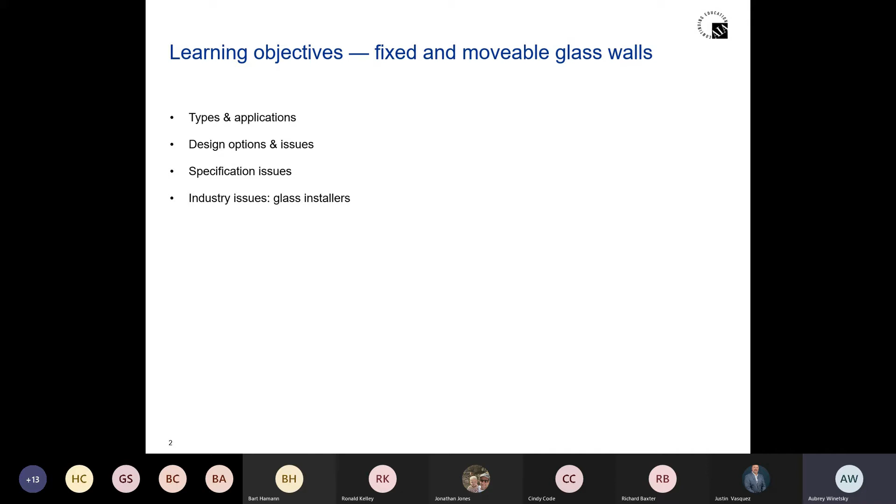There are different types of glass wall systems, and we'll go through the two types here, taking a break after each section for questions. We're going to talk about fixed glass wall systems, which include patch fittings, rails, and single point or spider fittings. Then we'll move into movable glass wall systems, where we get into stacking, bifolding, biparting, and bottom rolling.

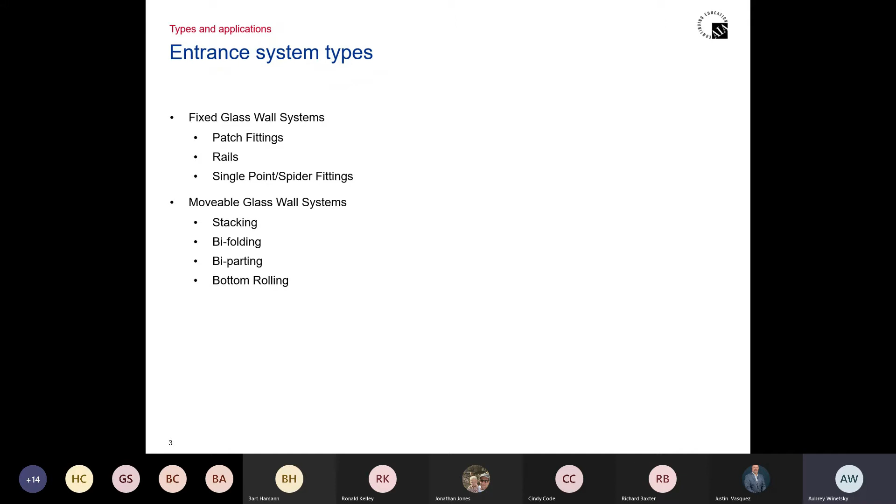There is a group called GANA, G-A-N-A, which stands for the Glass Association of North America. GANA is a group of industry leaders that put together some general rules we should all follow. If you came to me and said, 'I want to make this glass door 13 feet tall and only use half-inch glass,' I'm going to defer back to GANA and tell you we probably shouldn't do that. GANA recommends that we stay within certain heights. GANA is not a code, not a law, not anything we have to follow to a T. However, they are recommendations, and many glass fabricators will not fabricate glass pieces outside of GANA recommendations.

These are the four glass door types that GANA has given names to: type P, BP, A, and F. We'll go through these a bit more and the pros and cons of each style.

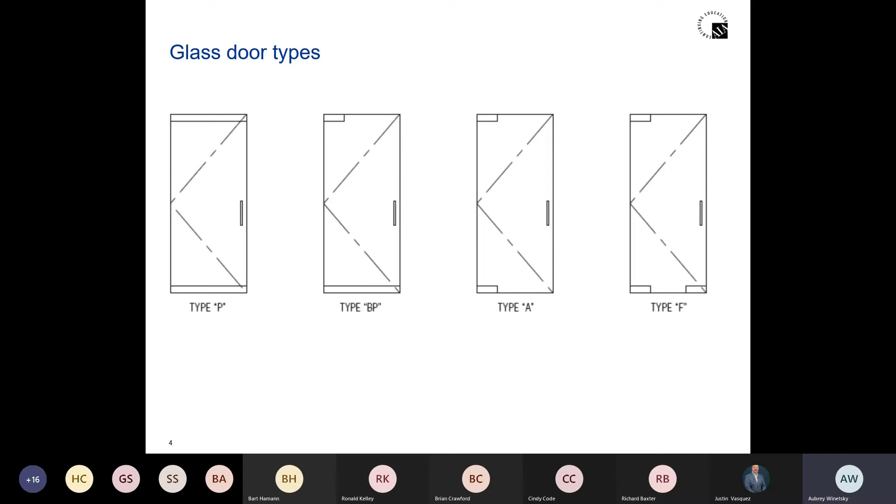So here we have the P style door, and I would say you're probably going to see these, if I had to take a guess, probably 80% of the time. A P style door means that you've got a rail on the top and a rail on the bottom.

With this door, GANA will allow you to go to about 108 inches, and I know we see doors much taller all the time, and you can push those limits a little bit. We'll talk about that more throughout the presentation. But with these doors, this gives you the most adjustability. You can go from left to right, in and out, top and bottom. You have a lot of adjustability on how that glass sets in these rails.

With top and bottom rails, you are staying within ADA compliance, and you do have space to mount hardware. So if you needed to use a Maglock, you've now got that top rail that you can mount to. A lot of good reasons why these are probably used most often.

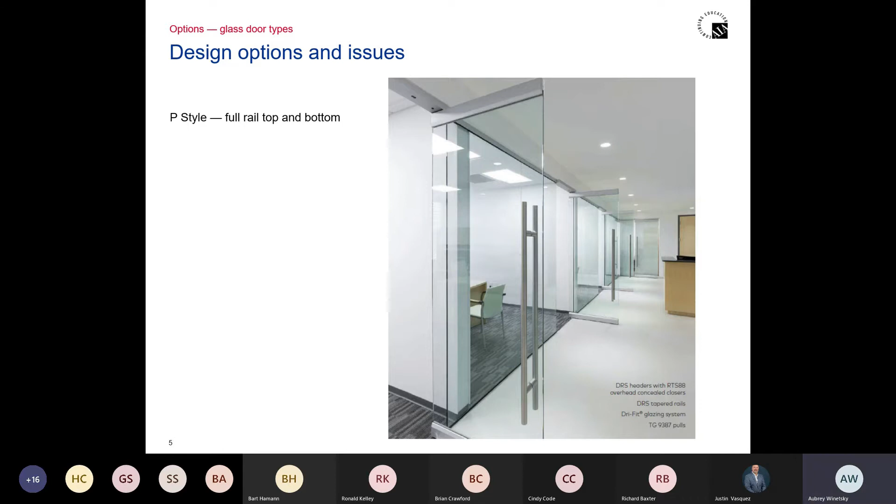A BP style door, as a matter of fact, I just specified one of these yesterday. The architect I was speaking to was concerned. I'm in California, so a lot of the projects I work on are in California, and California, as some of you may know, we're very strict about ADA, and it even boils down to having our own codes as it pertains to ADA in a lot of ways.

This particular client was concerned about having a patch fitting on the bottom and that not technically meeting ADA, as far as that 10-inch bottom clear smooth requirement goes. So we chose to use a bottom rail on this door and then to use a patch fitting at the top, still staying very much within code, but also allowing for that really unobstructed view of the glass.

With this type of door, you're only going to be able to use a floor closer, unless in this situation we were to use something like a floating header. But these are most often used with floor closers. This is going to have a little bit less adjustability when it comes to setting the glass. You're really only going to have a little bit of adjustability up and down.

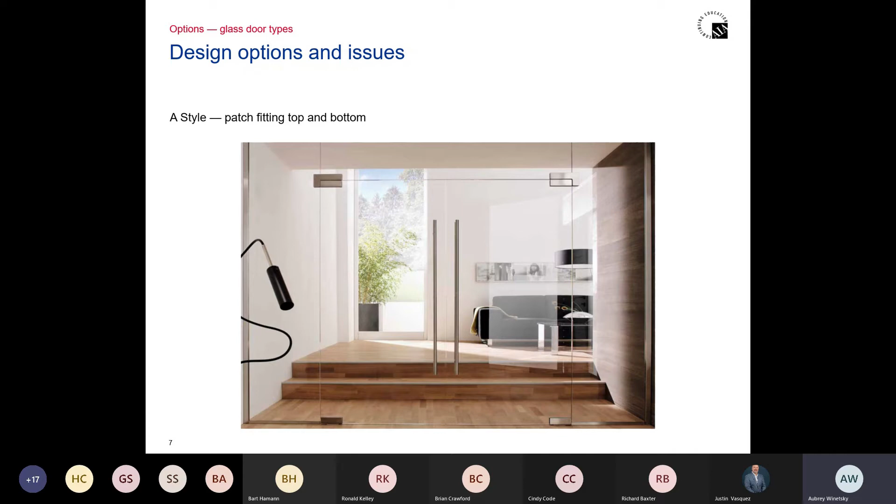With this type of door, you're going to be limited on the size. GANA recommendations, the maximum height for this type of door is about 102 inches. And the adjustability is going to be very, very little, really only a little bit of up and down with the glass.

This, I would say I've probably only specified this a few times, only because my first concern would be ADA, having to have someone get down to the bottom of that door to kneel down and to lock it. So it's not used very often.

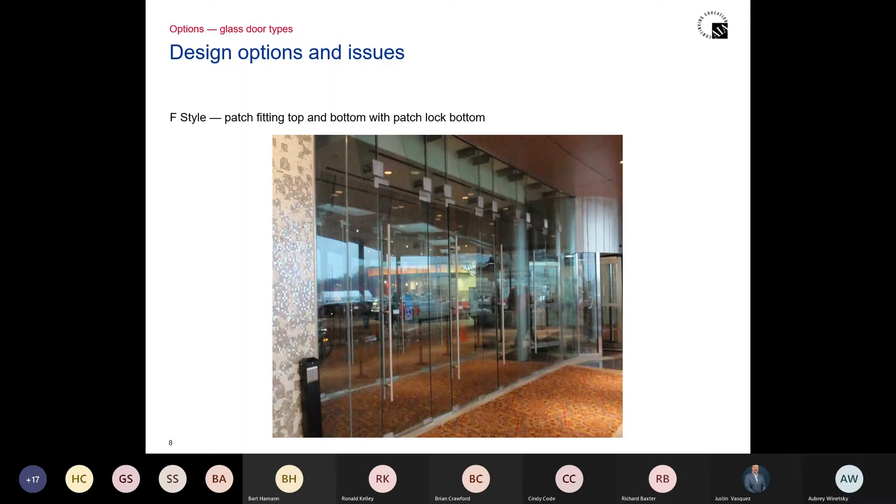This is kind of what a patch fitting looks like. Generally, depending on who the manufacturer is, they're going to be about 2 by 6. You actually prep the glass for the patch fitting to lock or to be mounted through to give you a secure hold of the glass. So this is kind of a cut of what that looks like.

Some of these patch fittings come, as we can see here on the left, we've got 3 of these covers, and some of them come as a stainless steel fitting, but they come with a plate that can be mounted, and that plate can cover, you can pick different finishes.

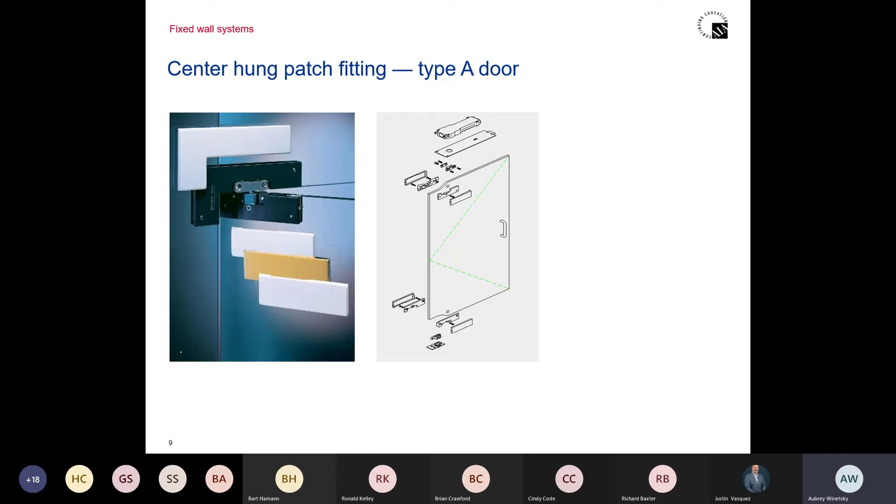You can leave that cover off during construction, so if you're afraid that something's going to be damaged, you leave the cover off, the door can be fully functional. Then at the point that the job gets turned over, you add the cover back on, and you avoided it getting damaged. The covers snap on and snap off. If you wanted to change the finish, you could do that, or if they got graffitied or damaged in any way, you could easily swap that out. So that's kind of a nice feature on those.

Now we get into rails, shapes, and sizes. I always say with this photo, I don't know if this is a good representation or a bad representation. I'll let you guys be the judge of that. But when I look at this picture, the first thing that jumps out at me personally is I see that we've got probably a 4-inch top rail there and a 4-inch rail on the bottom.

And then you've got just a U-channel on the fixed lights. Now, it looks nice on the fixed lights, I'll give them that, because you don't have a lot of bulky hardware, but you've definitely got this difference in sight lines. So you've got this rail here and then it doesn't really match up here. So that's the first thing I notice.

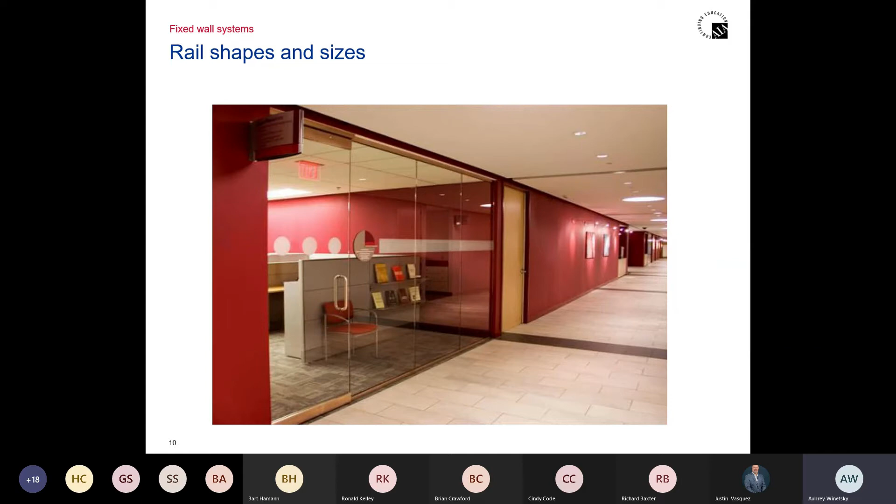So rails, you can get side light rails that basically hold the fixed lights of glass. You can get those to match the same rails that you're using on the door. But they come in a variety of different sizes and a couple different shapes.

So as we move into looking at these rails, the different sizes and shapes, you'll find rails anywhere from 2.5, 3 5/8, 4 inches. I've seen 4.5, 6, 10, and I've even seen 12-inch rails before. The general rule of thumb is if you're using a 10-inch rail, it should be square. And for ADA purposes, if you're using anything less than 10 inches, that rail needs to be tapered at a 60-degree angle.

So as you can see, you can use something like the 2.5 and keep that really small profile height on the rail, but it has a taper, so you're staying within ADA. I often get from architects this idea that you have to use a 10-inch bottom rail, but you don't. You can go smaller, it just has to be tapered.

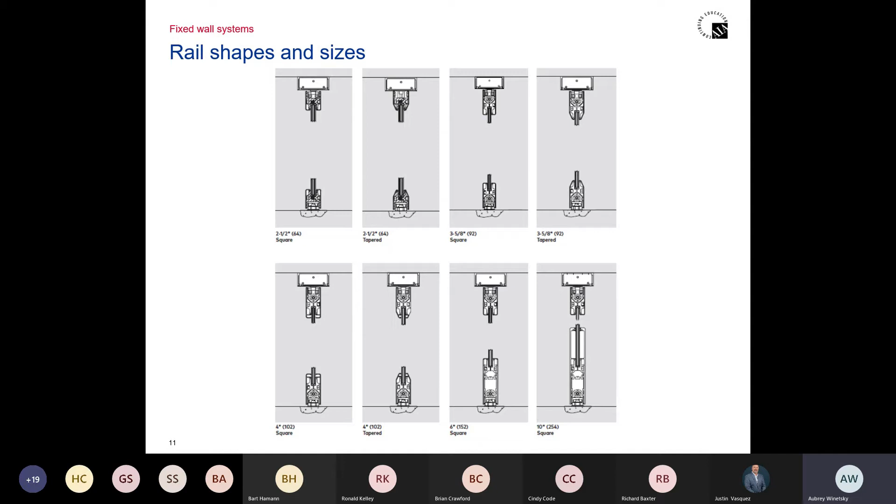When I was back in the automatic door world, we used this type of rail to mount glass for our automatic all glass doors. And it was a real pain because we'd have to order the glass and order the rails, and then we'd have guys come in and spend generally a whole day setting the glass into the rails. They'd take the bottom portion of the glass and sand it just to give it enough grit so the cement would hold on to it.

We'd set the glass into that rail and let it sit overnight. Then they'd come back the next day, flip the door over, and do the same process on the other side. So it was a very, very labor intensive process. And with an automatic door, we're looking at 4 panels just to make up one door. They'd spend the whole day, come back the next day, spend the whole day. Then the door was finally ready to be installed.

And heaven forbid that piece of glass break at some point. Or, since I'm in California, some of these doors were exposed to different weather conditions, heat. Eventually, sometimes this cement would erode and the glass would slip out of the rail. And in that case, the building is left really without security. You'd have to board everything up, bring the rails back in, and start all over with a new piece of glass.

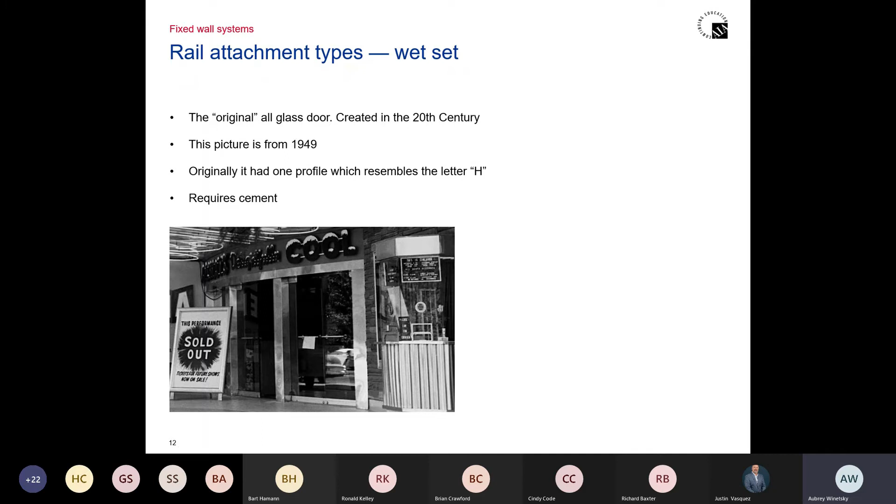And the problem is, I don't know about you guys, but in my career, I've yet to see a perfect opening. So you'd get these rails out to the job site, and unfortunately, the flooring was off, or the opening wasn't plumb and square, and there's no adjustability. Once these things are cemented in, they're done.

So that took us to the second generation of rails. This was a little bit better in a lot of ways, but there were still some problems. The second generation required a hydraulic press, and these were press-on type rails. You'd set the glass in, use this hydraulic press to press the rail onto the glass, and go from there. So much quicker. It didn't take all day.

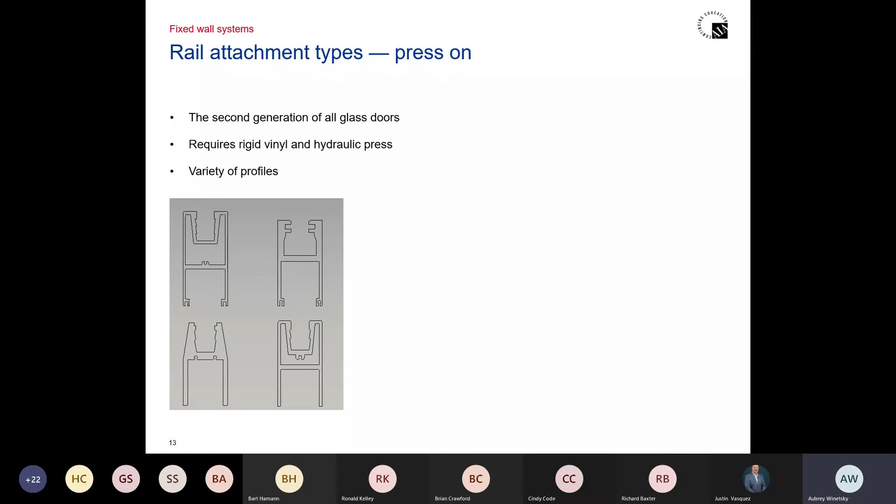It didn't take 2 days. But again, you're kind of faced with the fact that if the glass isn't just right, you have no adjustability. So once you take that out to the job site, if it isn't just perfect, you're not in good shape. And you had the price of buying the hydraulic press.

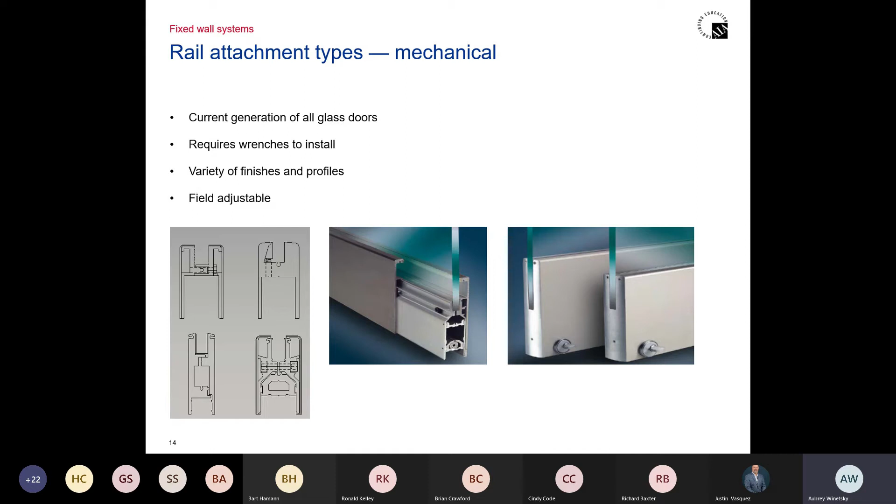So that brings us to the third generation, which is what most manufacturers are using now. The current generation is a mechanical channel that basically just requires an Allen wrench. You set the glass in, you tighten the Allen wrench, it clamps onto the glass, and you can do this in the field. You can do this in under an hour. You can adjust the glass. This is really the best solution we've found yet. So these rails work very, very well, much better than the hydraulic and the cement types of applications.

Now moving into headers. Every door is going to need a closer somewhere, and one of the areas where we can house a closer is overhead in the header. Headers come in a few different sizes. You can get 4 1/8, 4 1/2, or 6 inches, depending on what kind of framing you're trying to match up to or what you've got going on inside of the header. Inside that header, we can put the overhead closer. We can put shear locks or electric strikes. All of those items can be housed inside this header.

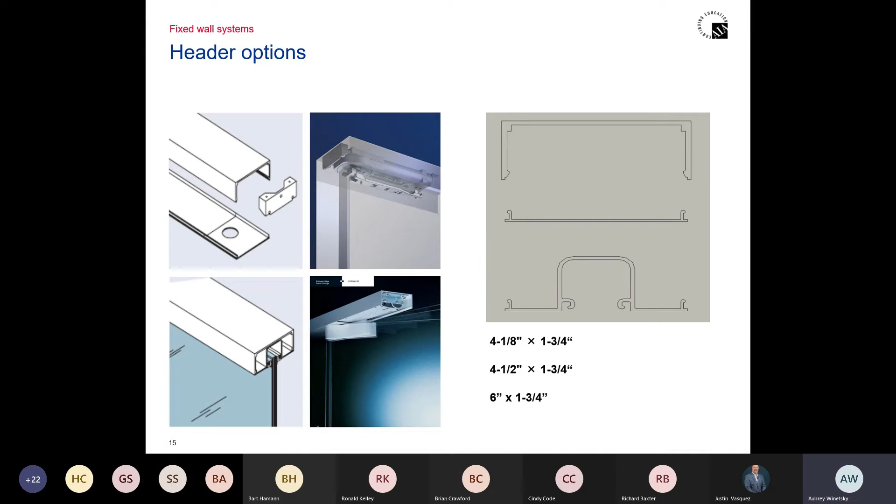So you've got the portion that goes over the door, which is what we're looking at right here. And then if you had the door and some fixed lights, like what we looked at a few slides back, you've got that header, and then the snap-on cover for the closer. And then you can have the glazing channel that will run along the fixed lights and hold the light of glass that you have there. So it's kind of neat that you can keep that same profile, run it the whole width of the door and the fixed sidelights, and keep everything looking very universal.

I often run into situations where, going back to that 13-foot door, I get asked for really, really tall doors that exceed GANA guidelines, or doors that could probably be made very tall, but then they're so heavy that people can't open them. So when we run into those situations, a floating header is a really good solution. If you want the look of a very tall door, or you have a transom above a door, but you can't use a floor closer, because for whatever reason you can't recess into the floor, or the door has a maglock on it, we have a floating header.

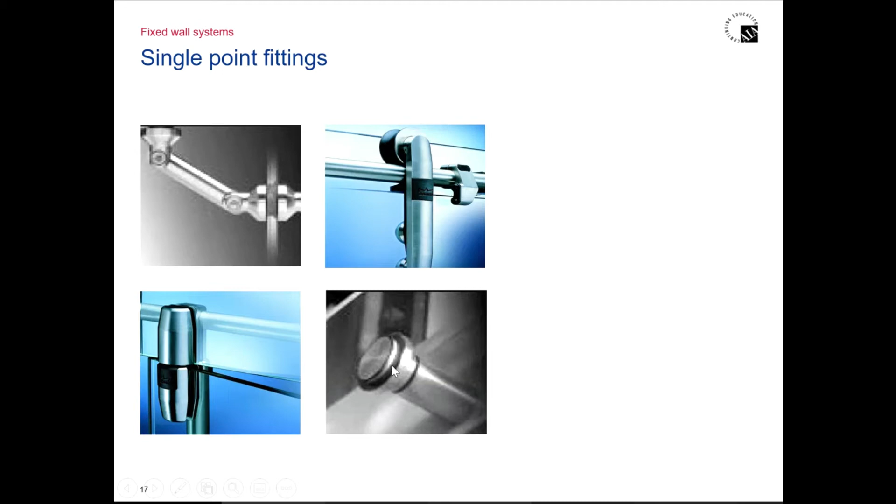Single point fittings. This still falls under the fixed wall systems category, and single point fittings are just another way that you can mount glass. We see it a lot in structural glass. These are just some examples. They're really hard to see. I feel like these pictures don't really do these products justice, so I'm going to go to the next slide, which I think is a little bit better.

Oops, I'm sorry, I thought there was another slide there. We see these a lot on stairwells. I personally have not specified any of these, but I do know that you see them a lot in stairwells where they're using that glass rail look. In offices, I've seen them interior and exterior, a lot in structural glass.

When we're specifying something like this, when we're looking at using one of these products, one of my first questions would be, do we have to achieve an STC rating? So do we have to worry about sound transmission? And depending on what that answer is, that moves us in the right direction as to which product

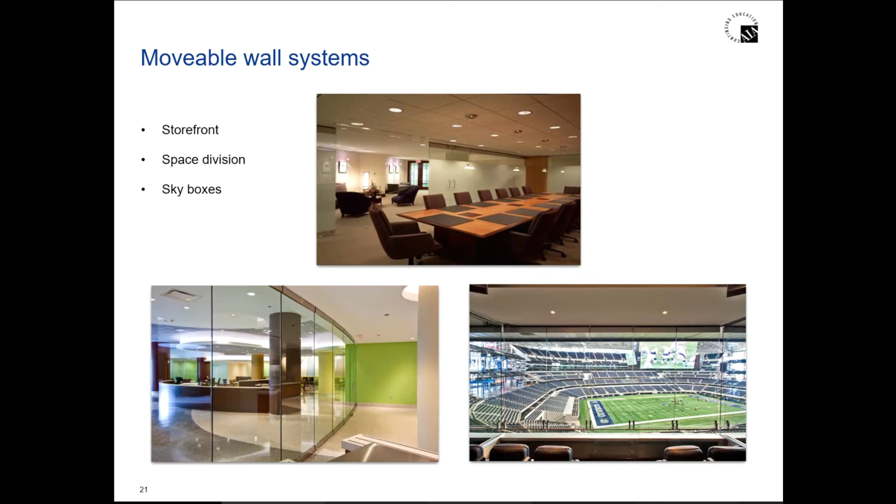When it comes to skyboxes, we're seeing these everywhere in suites, all over different stadiums where they want to have these particular skyboxes or suites. They want to keep that indoor-outdoor feel, so they can leave them open or leave them closed, just depending on weather.

And the stacking location can be anywhere. So if you wanted it to be right near that room, you can split it in half and have half the panels on one side and half on the other, or move them all to one side. If you want to have those panels stack away and store on the other side of the building, that's a possibility. The possibilities are kind of endless. It all just depends on how much room and space you have to run that top track.

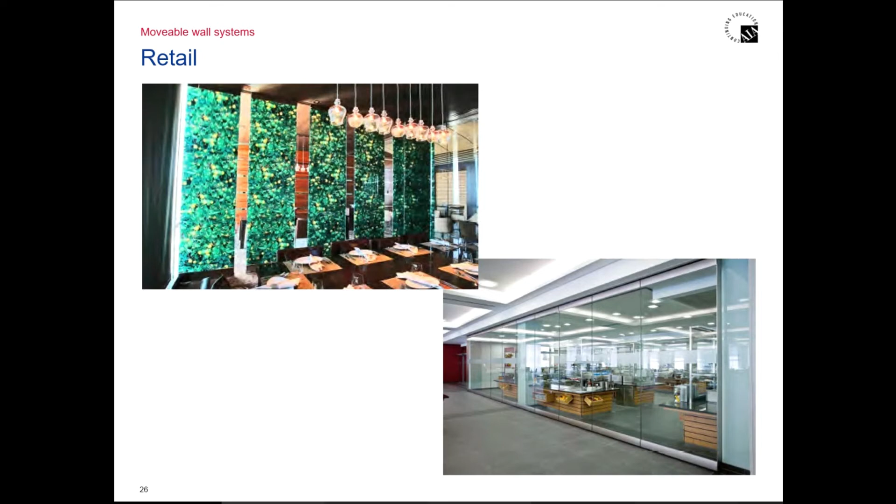Just some more examples in retail. Again, this is kind of like what I've seen in airport type situations where you want a big area for people to walk in and out of throughout the day when the retail store is open, but at night you want to secure everything and close everything up.

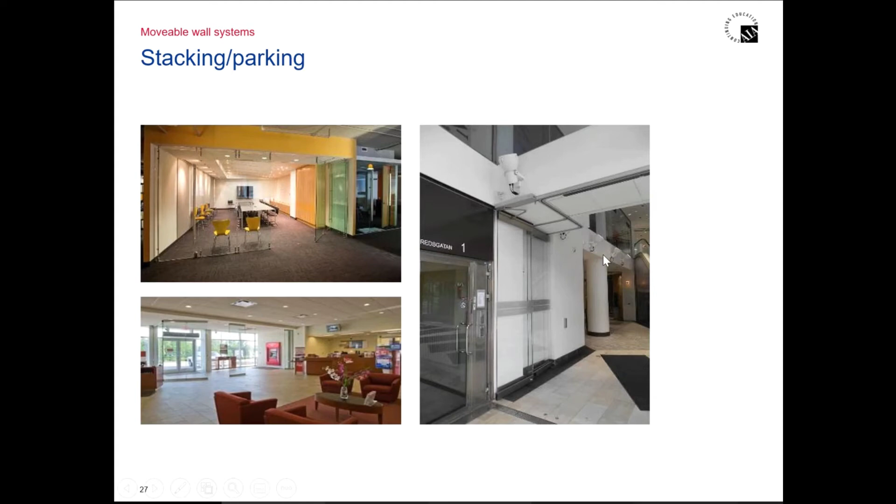These also come in a folding system. The folding systems are kind of nice because I just mentioned that stacking area where it turns into a lowercase h, where it turns into the 2 tracks. With the bifolding system, everything stays on a single track. So if you don't have the space to run that double stacking track up on top, a folding system might be a better option.

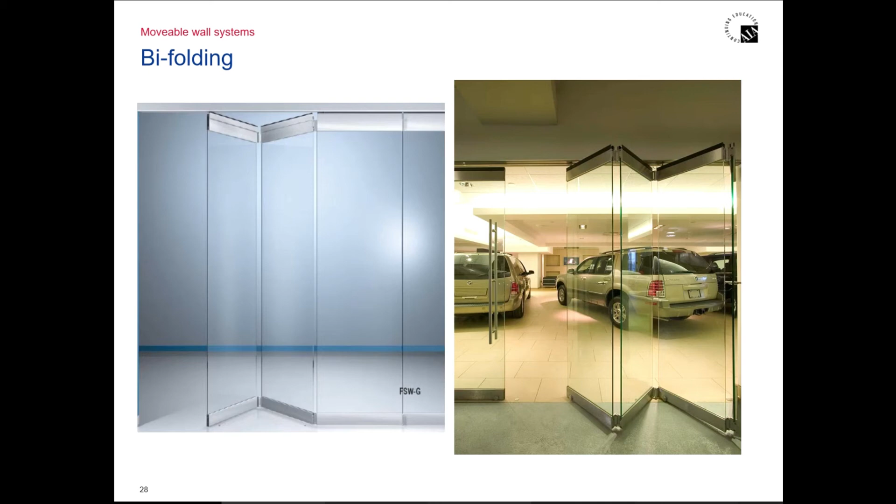I'll go ahead and get into, we're still within the movable wall systems, but now we're getting into more sliding systems. So going back to the first generation of sliding glass doors, they were all based on a bottom rolling or a bottom track system. A lot of people have gotten away from that bottom track, because you are required to have this bottom track in the floor. Most people like to have something trackless.

You get a lot of dirt and debris, which will eat away at the rollers if you're using a bottom rolling system. So just not the best system out there for that.

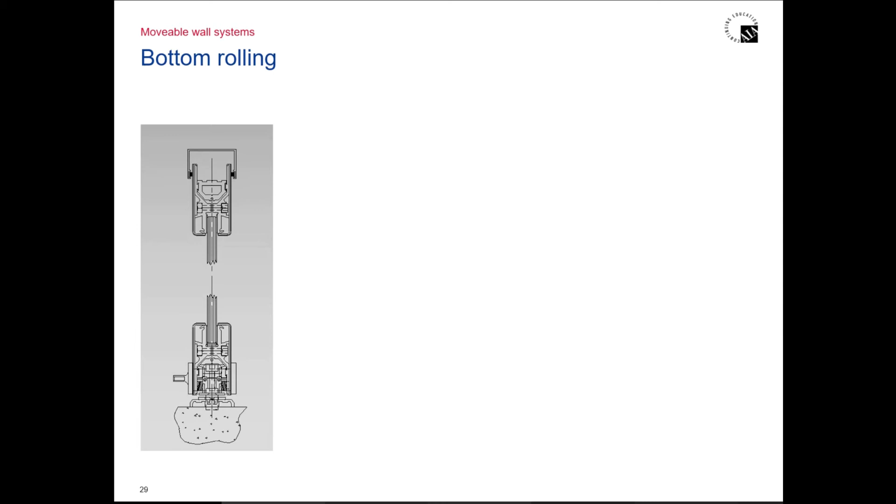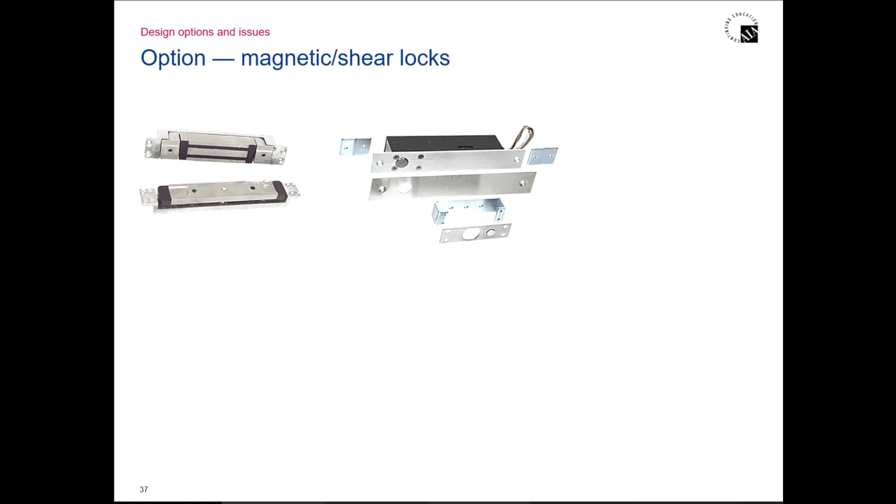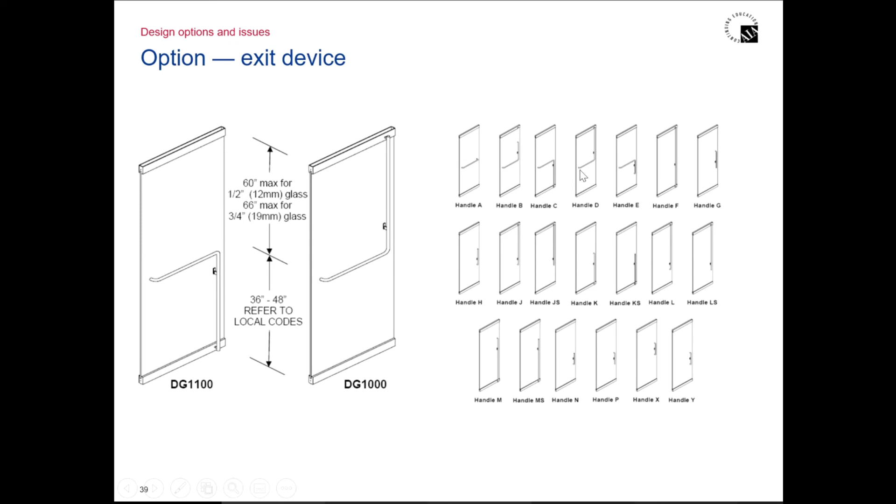There are exit devices available. I think we're all pretty familiar with this kind of tubular exit device. There are options to lock into the floor or into the head. Again, I never recommend they lock into the floor—I only specify locking into the head. These are some examples; this is the one that locks into the floor, which I'd never recommend. On the opposite side of the door, you have options for different types of pulls, so if you wanted a mirror finish for what you have, you can use this handle here, among a bunch of different types of pulls.

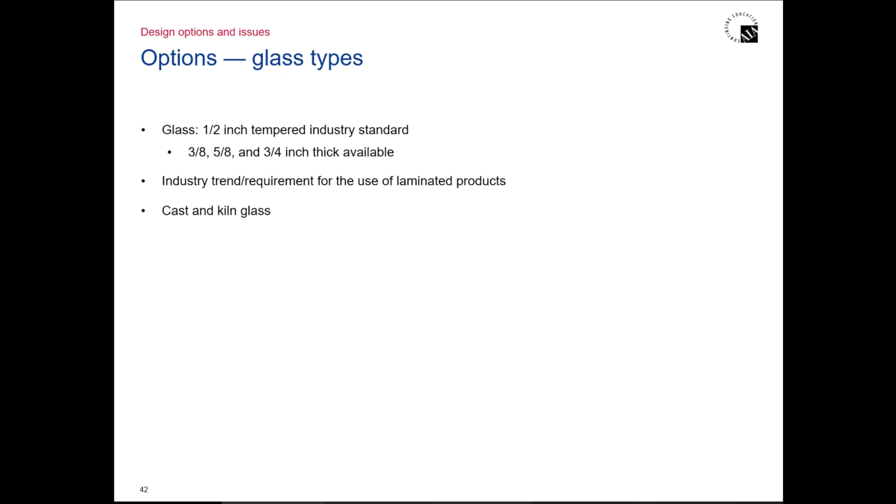That would be GANA's recommendation because it would help with deflection. You can use laminated products. We're seeing a lot of requests for laminated. And then cast and kilned, or textured glass, can be used with these products as well.

Some of the design options and issues with glass. We talked about this earlier in the presentation. It's glass, and glass can break, unfortunately. So it's probably not the most secure of items that you can put in a building, because you are always exposed to that potential of the glass being broken.

There is minimal noise abatement. We talked about that too, unless you're looking for something that's got a lot of framing around it. You are going to have sound transfer.

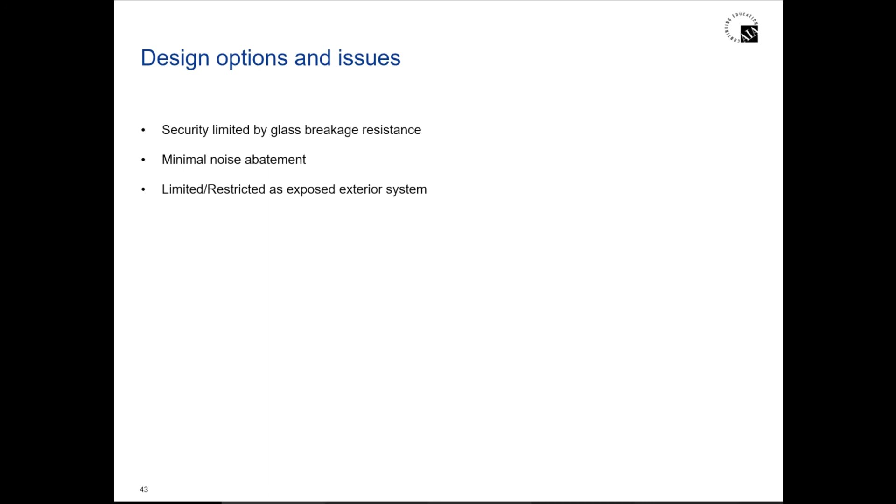And the question we talked about a little bit earlier, you are limited and restricted because these systems on the exterior of a building will have gaps. These systems inherently have small gaps, and we can do things to mitigate that. We can put seals in between, you can put brush and felt and everything else. But again, if you're going for this all glass look, and then you add all of these additional items, is that really what you're trying to do? Because it does kind of take away from that all glass look.

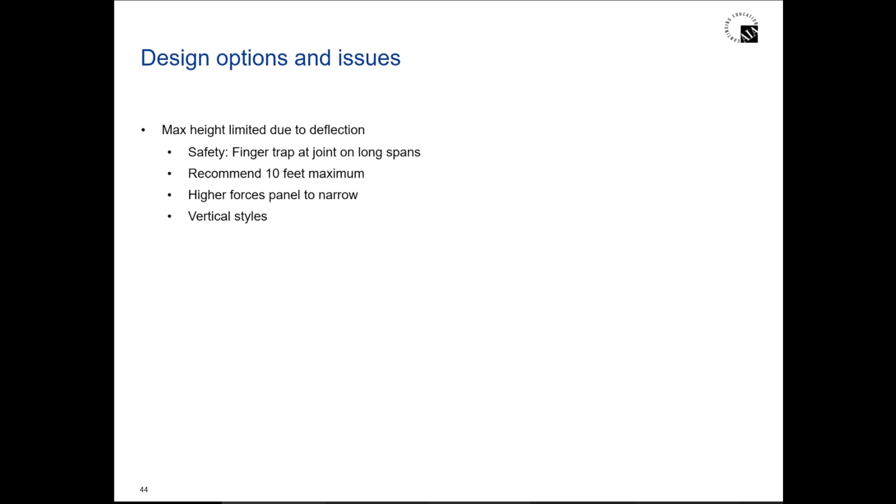We are limited to height. I mentioned that before, because of deflection. When the glass bows, if you have 2 pieces of glass on a fixed section, you can push that glass and actually pinch fingers in there. So it can be a little bit dangerous. So really most of these systems, you're going to have a 10-foot max. You have to add vertical stiles and things to help with the stability of that glass so that it just doesn't bow.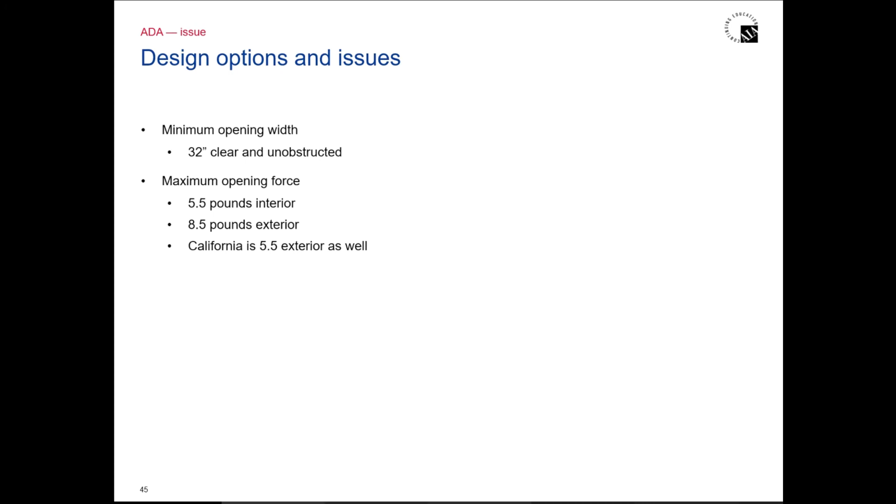ADA, we've talked about that throughout this presentation, so I won't go on too much on this slide. I would just say check with whatever opening forces are required, because again, these doors can get very heavy. Certain closers can only go to certain weights and won't allow for that 5.5 pounds or 8.5 pounds, depending on where you're at. Again, even with glass doors, we still need to keep in mind that we need to keep that 32-inch clear door opening.

And now as we get to the end of the presentation, and since we've got just a few minutes left, I'll save all the questions until the end. But when it comes to specification issues, these are the things that I will try and help you with if we were working together.

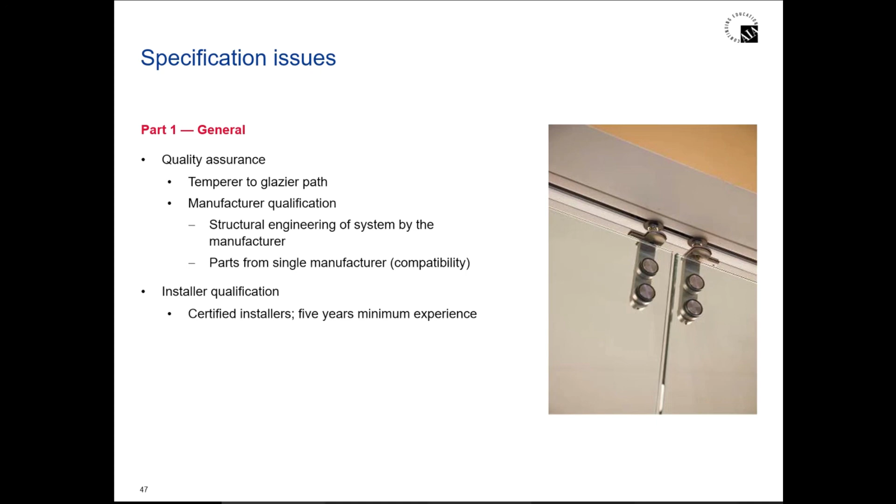We want to make sure, because these systems are made out of glass, they're heavy, they do require some structural support, that you're using high quality items and that you're going through the right people. You want to make sure that the installers have 5 years experience at a minimum, and that you're using a reputable glazier and manufacturer. You want to get all the parts from one single manufacturer.

With the glass wall systems, the movable systems, we like to recommend an hour of training for the owner. So whoever's using these systems, we want them to know how do they lock, how do they move, and how do you get them into those parking spaces. It's a good idea to look at doing a maintenance contract.

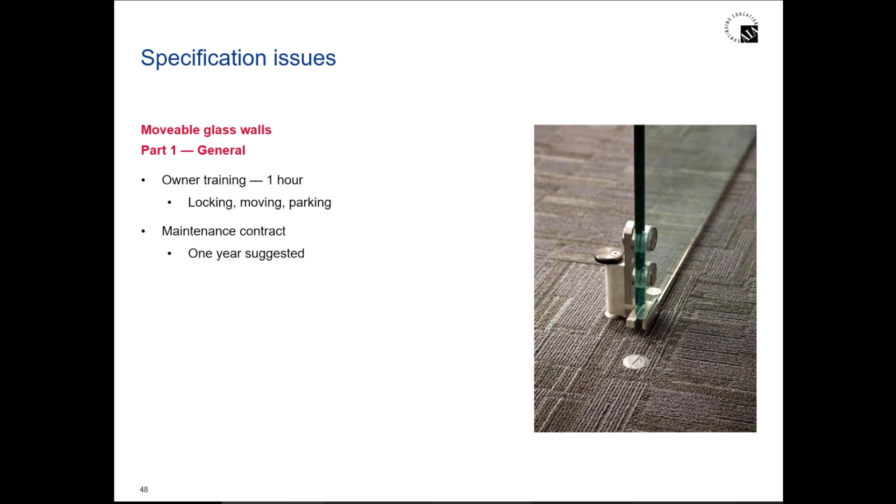Again, you want to avoid low quality substitutions, things that just really won't hold up and stand the test of time, because these things are so limited by weight and load capacity. You want to make sure that you're using the right hardware and that you're not pushing the limits of what these products can do.

And then on execution, you want to make sure that there is an inspection of the substrate. Again, this is really important when it comes to these top hung movable wall systems. You want to make sure that the installation is really coordinated and the structural frame and support is done properly, and that there is some training on how to protect and clean these systems after construction.